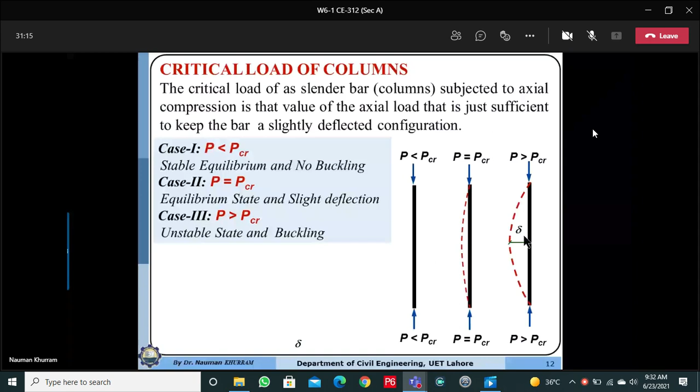So at load 80, the stress in this steel column will be 80 megapascal. 250 minus 80 means we still have 170 megapascal reserve capacity, which we believe it can carry as more stress. But what happens if I apply the load fractionally more than P critical, which is 80? If I apply load 80.0001, the column suddenly bends in the out of plane direction and fails. It will never come back to the original position.

That is the behavior of the column under compression. So buckling always occurs if the load is equal to or more than P critical. At this point, a sudden out of plane bending of the column due to axial compressive force is referred as buckling. This is how buckling is different from bending. So how can we define critical load? This is the load value at which the column slightly attains a deflected configuration, or this is the maximum load value that a column can withstand before buckling.

We can refer to this stage as stable equilibrium, because if the load is less than or equal to P critical and we remove the load, the column will come back to its original position. At zero load, the stress will be zero, and at P critical we will have the stable or neutral equilibrium. If the load is more than P critical, the column will never come back to its original position.

So this is the load versus lateral deflection graph, where delta represents the lateral deflection. If we keep increasing the load, there is no out of plane deflection until we approach a threshold value equal to P critical. If we apply load more than P critical, the column suddenly fails, buckles, or bends in the out of plane direction and fails. This phenomenon only occurs in an ideal column.

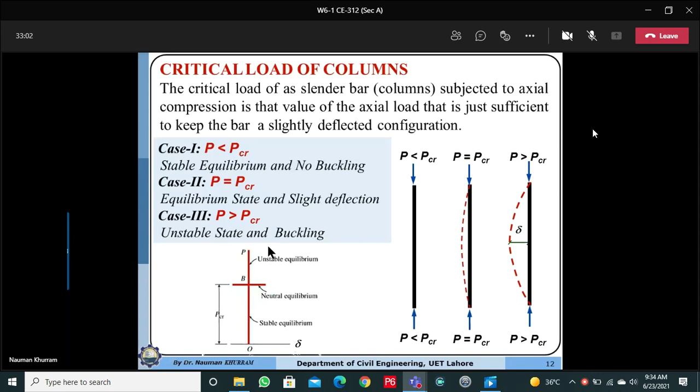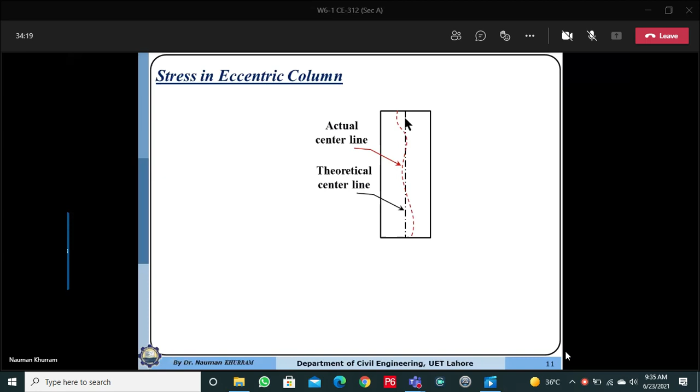An ideal column means the column which is prismatic, meaning it has a constant cross-section area, the material is homogeneous, and it's a straight column. It may have little out of plane deflection, and due to this, the actual center line may deviate from the theoretical center line.

Further, if the applied load is not passing through the theoretical or actual center line, rather acting at a plane or axis other than the actual or theoretical center line, the load will also have eccentricity. Here we refer to ET, the eccentricity between theoretical center line and actual center line, and EP, the loading eccentricity with respect to the theoretical center line. Due to this, if the column is a real column rather than ideal, we shall always have eccentricity.

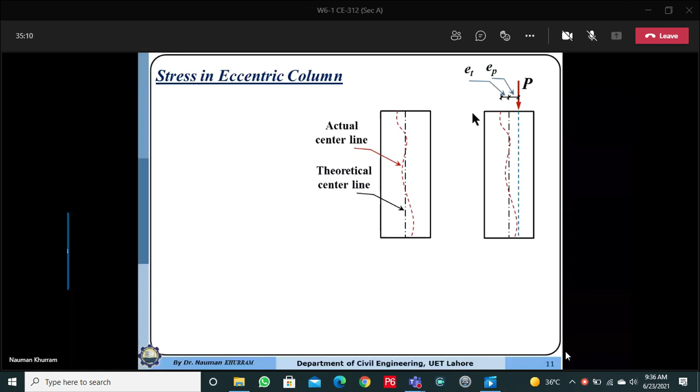Due to this eccentricity, the column will be subjected to bending moment along with compressive force. So what happens? The column is subjected to bending. For example, due to this total eccentricity, which is ET plus EP, the column will be subjected to a clockwise bending moment, and due to this clockwise bending moment, we shall have tension on one side and compression on the other. So the column is subjected to bending along with compressive forces.

In such a case, if we are having any eccentricity or imperfection, the column is subjected to some extra stresses, and its capacity will be less than the column corresponding to the ideal case, which is free from any eccentricity or imperfection.

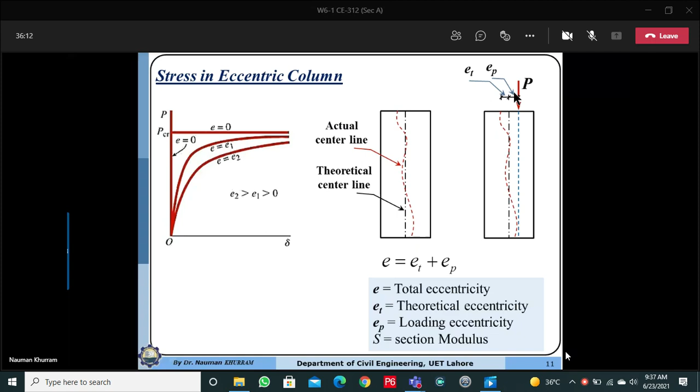And further, due to this bending moment, because the column is subjected to bending moment along with axial force, even though we keep increasing the load value below the critical load, the column will undergo small out-of-plane deflection.

This happens even though the load is less than P critical, until we approach the failure load. The failure load in an imperfect column will always be less than P critical corresponding to the ideal column. So P critical of a real column is always less than P critical of an ideal column, and with increase of eccentricity, even though the load is less than P critical, the column will undergo gradual out-of-plane deflection due to the bending moment.

The resultant stress will be P over A, the compressive stress due to axial force, plus MC over I, the bending stress due to bending moment. C is the distance from the neutral axis to the extreme fiber, because we are supposed to compute maximum bending stress. So the resultant stress will be the summation of axial plus bending stresses.

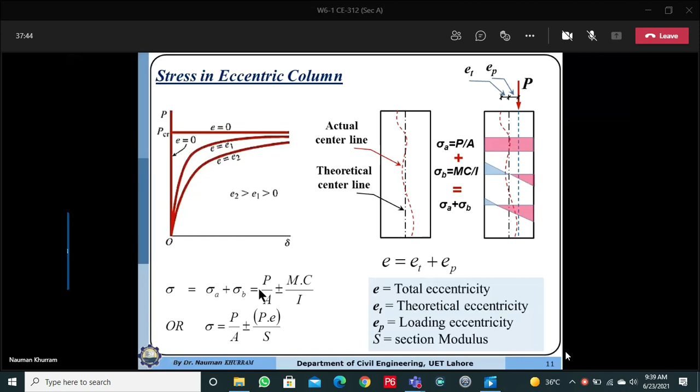If we sum up the stress components, we will have more compressive stress on this side and lesser stress here, because tensile and compressive stresses counter each other. So the resultant stress can be determined by this formula. I'm considering compressive stresses as positive. If you want, you can write a negative sign here, because we are supposed to compute the magnitude regardless of sign.

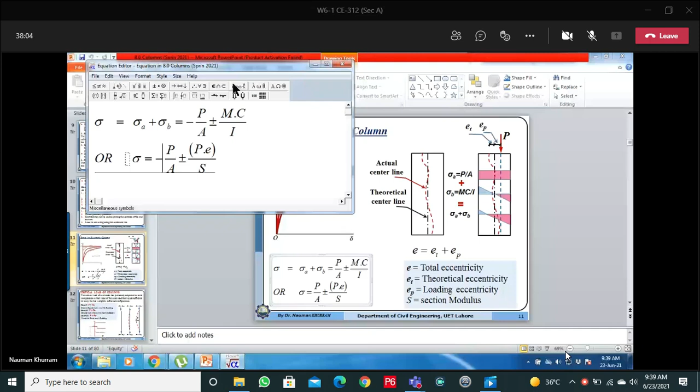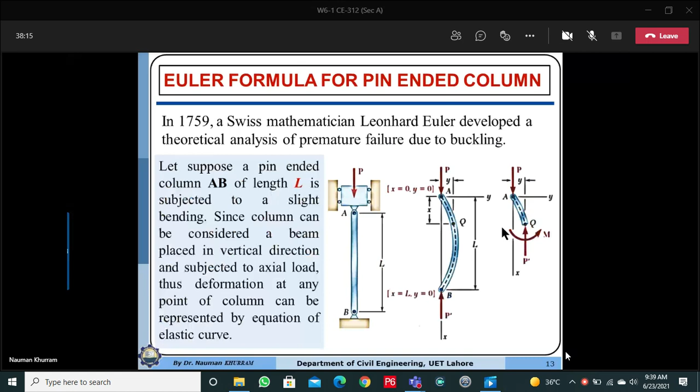So next, what I would like to explain: please go through the derivation of this Euler formula in the recorded video lecture, since most of the time I give some part from this derivation in my questions or quizzes.

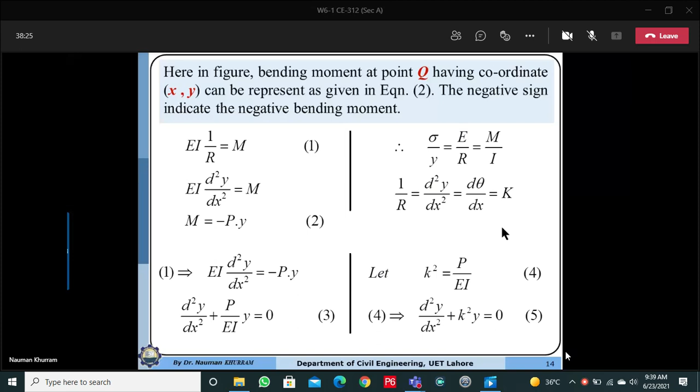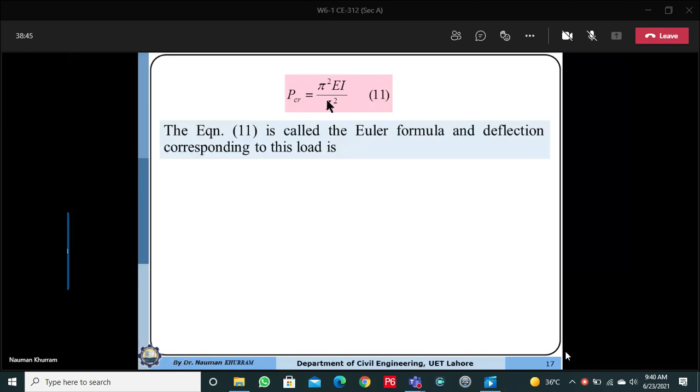In this derivation we derived the formula for critical load to determine the critical load for the long ideal column. The critical load of the long ideal column equals pi squared EI over L squared. We believe we have already discussed this in our lab classes, so I'm not going to explain the effective length factor and effective length in this slide.

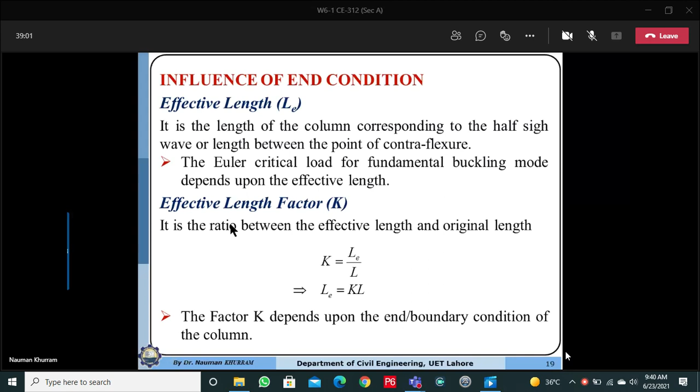Then we can convert the critical load into critical stress. If the critical load at which buckling may occur is divided by the cross-section area, we can convert it into critical stress. Critical load equals pi squared EI over L squared, and this area is here. Since I equals A times R squared, this A will cancel with the A from AR squared, and R will come into the denominator. So the expression becomes pi squared E over (L over R) squared.

This L over R is the slenderness ratio, which you can represent by R. Here pi is constant, E is constant, so it means that the critical stress of a long column is inversely proportional to the slenderness ratio squared, which is a quadratic function.

This formula is only applicable for the long column. So if you fix the stress value between the long and short column, you can determine the critical slenderness ratio.

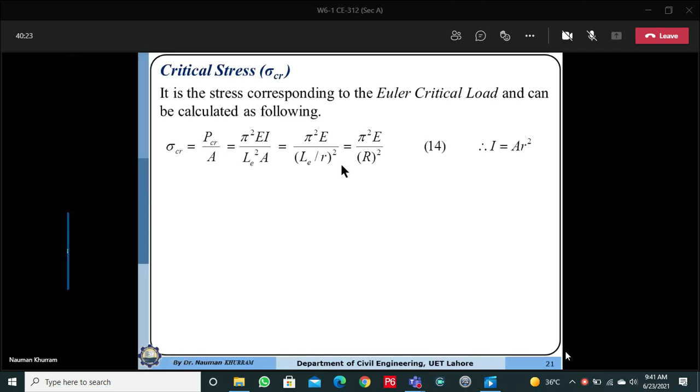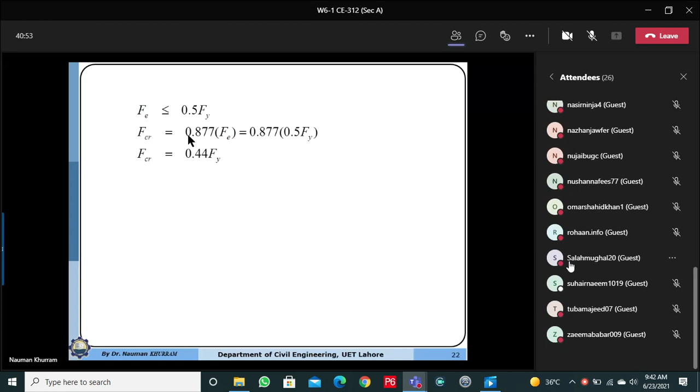Before coming back to this definition of long and short column, from our knowledge of steel structures, different codes and specifications categorize long and short columns differently. By AISC, the American Institute of Steel Construction, we do not have an intermediate column—we either have the long column or the short column. Depending on whether it's a long or short column, we need to determine the capacity by a different formula.

The capacity of the long column can be determined by one formula, and similarly the capacity of the short column is determined by a different formula, which is 0.658. I will show you this formula in a short while. So we have different formulas actually—I just want to give you the overview of steel structure design.

So in steel structure design, we have this threshold value: if a column fails at a stress value less than or equal to 0.5 Fy—if either the critical stress or buckling stress is less than or equal to 50% of the yield value—then the column will be regarded as a long column. Further, I told you that this formula is only applicable for an ideal column, which is free from any imperfection.

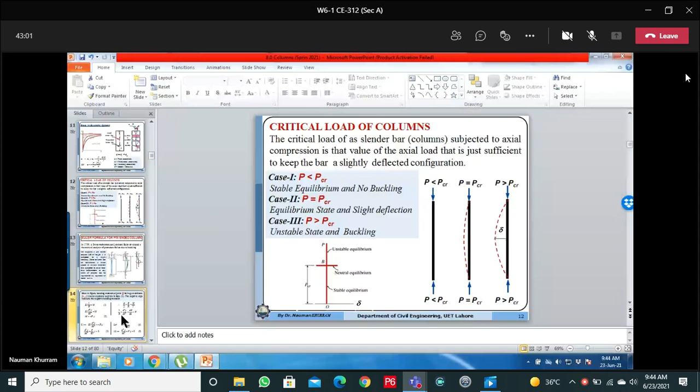So what is this factor 0.877? This is the capacity reduction factor due to imperfections in the column, to convert the failure stress of an ideal column to a real column. So 1 minus 0.877 equals 0.123, meaning we reduce the capacity by 12.3%. If you substitute the value of Fe as 0.5 Fy, the answer becomes 0.44 Fy.

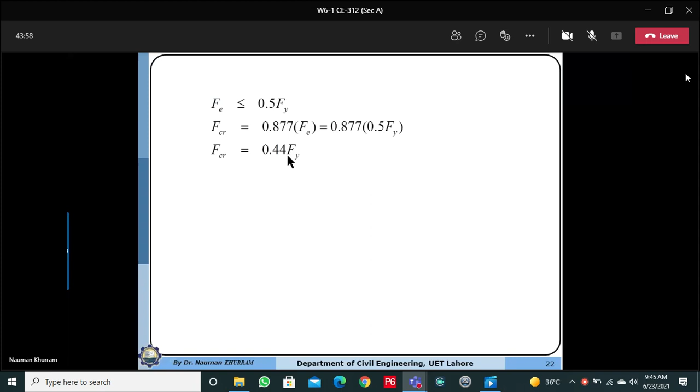So for A36 steel, just to refresh the knowledge, we know that Fy is equal to 250 megapascal.

It means that in that case, critical stress, maximum critical stress for the long column, this is the maximum value. It means that a long column will always fail at a stress value less than or equal to 0.44 Fy. So let me use this value, 0.44 Fy.

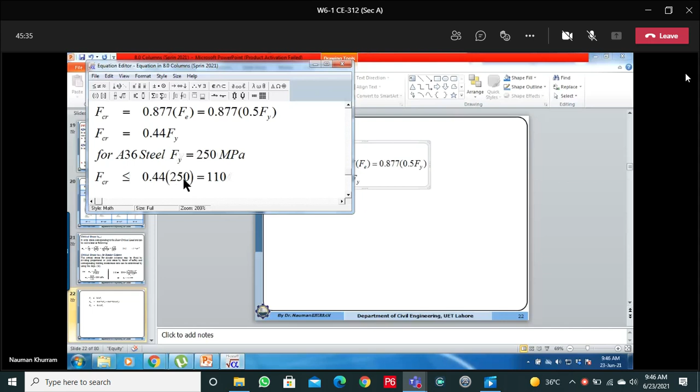So this value will be, what I say, 250, and the answer will be - let me compute the answer - 110 megapascal. So it means that a long column will always fail at a stress value less than 110 megapascal.

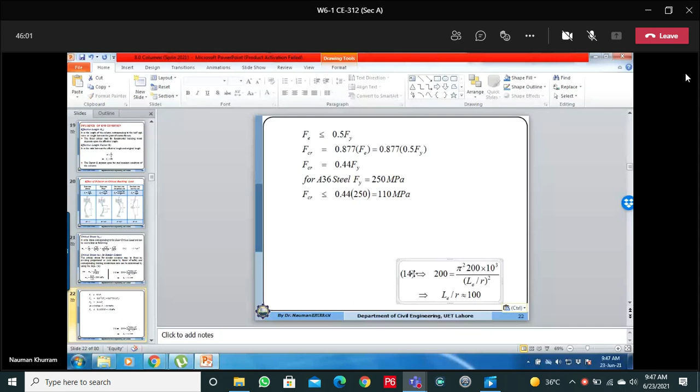This is not the exact formula that we are going to use. So we are having the formula for sigma critical. Sigma critical means this formula, so we are having this formula.

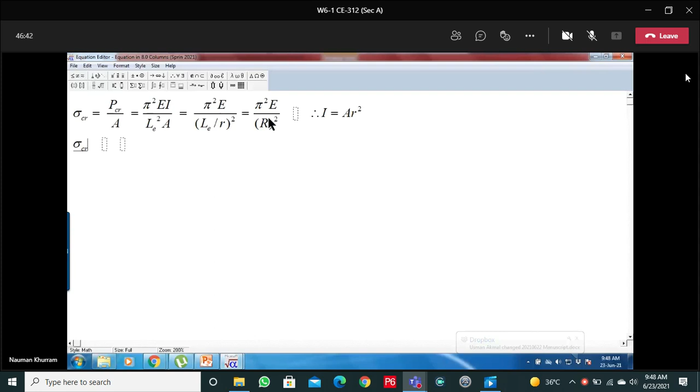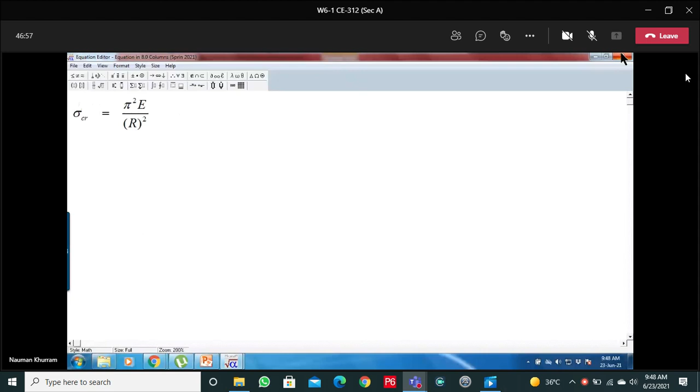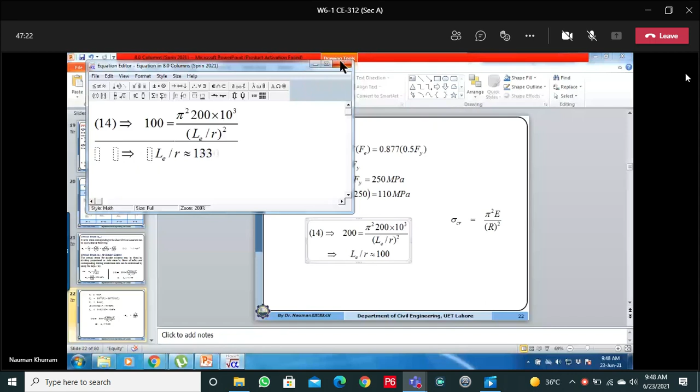So actually Fe and sigma cr are the same. In this formula, if you substitute this value as 110, you can determine the R value, and the R value that you determined was 133 in your steel structure. It means that if the slenderness ratio is more than 133, that will be a long column, and it will always fail at a stress value of 110 megapascal. So this was proposed by AISC.

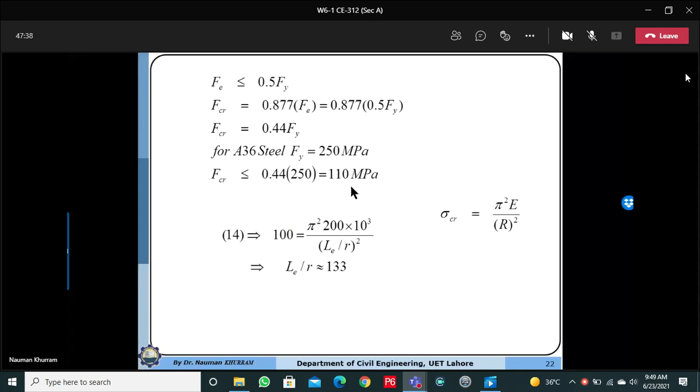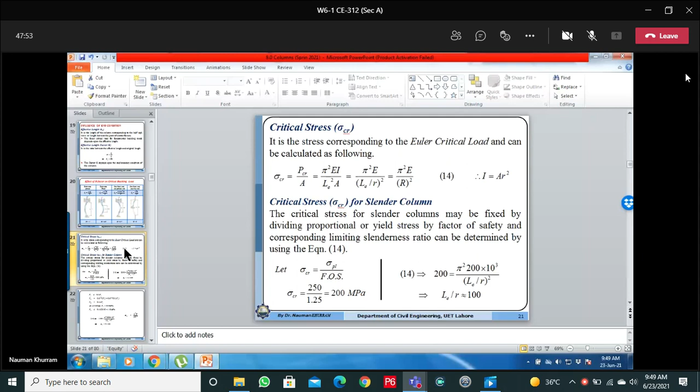But as per different structural analysis books, you can fix your own threshold value to differentiate between the long column and short column. The concept will be the same. AISC has fixed the value as I have explained here, but in this structural analysis book, a different value has been used. So I will give you that.

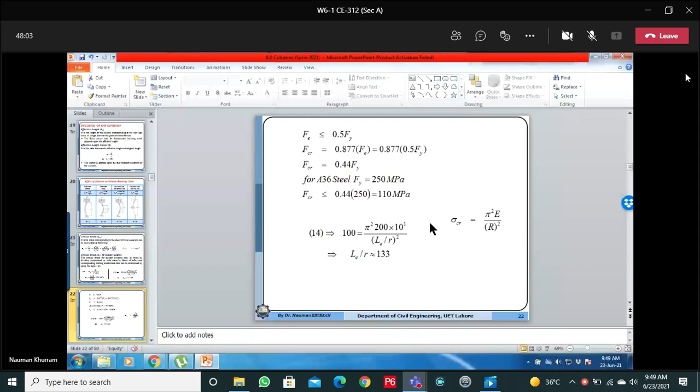So if you substitute critical stress equal to 100, you can compute the corresponding slenderness ratio, which is 133. It means that a long column is the column which has a slenderness ratio more than 100, or which fails at a stress value less than or equal to 200 megapascal for A36. So it depends upon what factor of safety you are using. A long column is the column which always fails at a stress value less than the definition here.

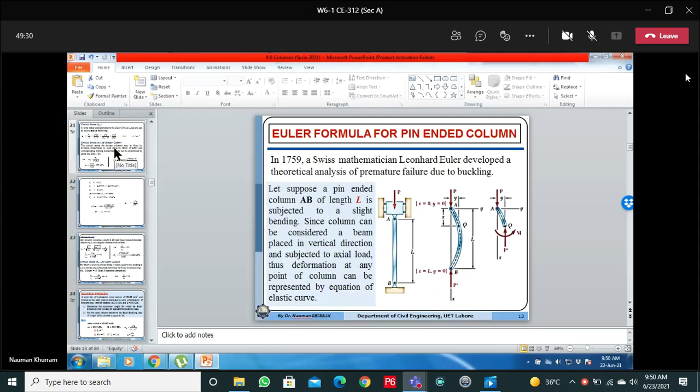Or there is another classic definition: if the length of the column is more than or equal to 30 times the least cross-sectional dimension. So if you see this derivation from the video recorded lecture, we are having slenderness ratio 100, so flexural effect will be dominant.

A long column will always fail due to buckling, and a short column is the column which primarily fails due to crushing or yielding of material - it never undergoes buckling. So the definition of long, short and intermediate column depends upon failure behavior, not upon slenderness ratio or critical stress. The slenderness ratio is indirectly converted from the failure behavior.

Normally experiments show that if the length of the column is less than or equal to 10 times the least cross-sectional dimension, then that column will never undergo buckling. That column will fail when applied stress equals the yield stress in case of steel, or the crushing value of the material for any other material. These types of columns normally have slenderness ratio less than 30. In between, we have the intermediate column. So I'm not going to discuss this problem.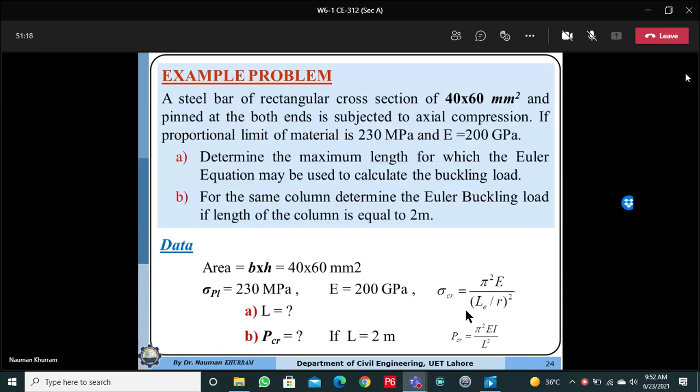So I'm only going to discuss the solution of one part from this example 10.1, and the book is Mechanics of Materials by Beer and Johnston, 6th edition.

Example is 10.01. We are having a column which has 2 meter length. Both ends are pinned, so K value is equal to 1.

We are supposed to design a square cross section column made of wood, with E value of the wood 13 gigapascal given, and maximum allowable stress value should not exceed 12 megapascal.

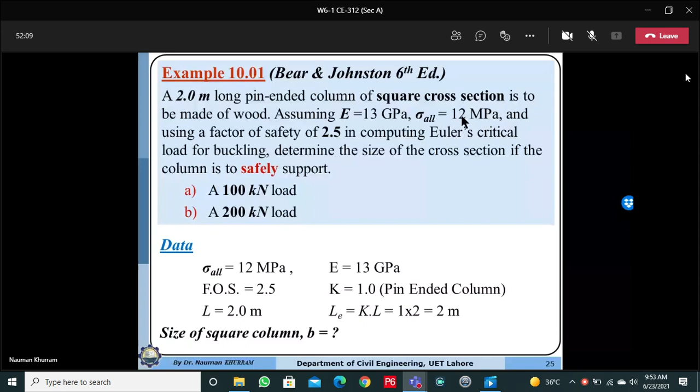Using factor of safety 2.5 in computing Euler critical load for buckling. So factor of safety is used to convert the critical load into the safe load, or to bring the stress value or loading from the collapse state to the safe limit. If the critical load is divided by factor of safety, we get the safe load value.

Determine the size of the cross section if the column is to safely support a load of 100 kilonewton and a load of 200 kilonewton. These are the safe load values given, not critical load. Safe load is always obtained by dividing the critical load with factor of safety.

I'm only going to discuss part B. Length is 2 meter, factor of safety 2.5, E value 13 gigapascal. Effective length will be K value multiplied by its length, which is 2 meters. K value is equal to 1 because both ends are pinned.

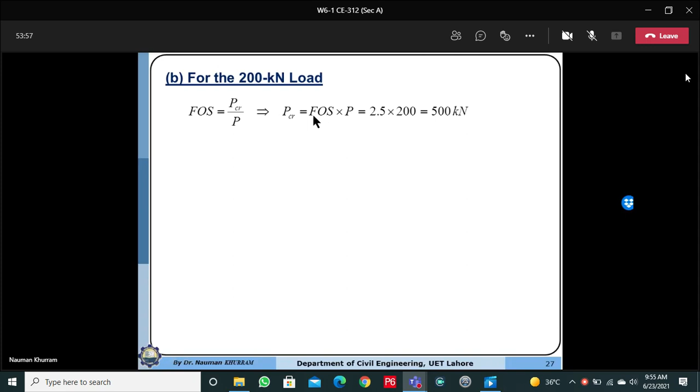For part B, factor of safety is the ratio between the critical load over safe load value. If we divide the critical load with factor of safety, we get the safe load. So we are given the safe load value, so we may reverse calculate the critical load by multiplying the safe load value with factor of safety 2.5, so critical load is 500. Why are we doing this? Because we only have the formula for critical load.

When we use this Euler formula, we have P critical value. We know the E value for the wood. We know the effective length. Pi is constant. The only unknown is moment of inertia.

So we can represent this equation in terms of I value by cross multiplication. Substitute P critical value 500 kilonewton multiplied by 1000, because all values in this equation should be in Newton and millimeter, so units should be consistent. Length is also in millimeter, and E value is also in megapascal, since we are given 13 gigapascal. After computation, we get the answer 15.588 into exponent 6.

Now we're supposed to compute the size of the square section. For a rectangular cross section, if both dimensions are equal to B, moment of inertia is equal to B d cube divided by 12. Since D is also equal to B, moment of inertia of this square section is equal to B power 4 divided by 12.

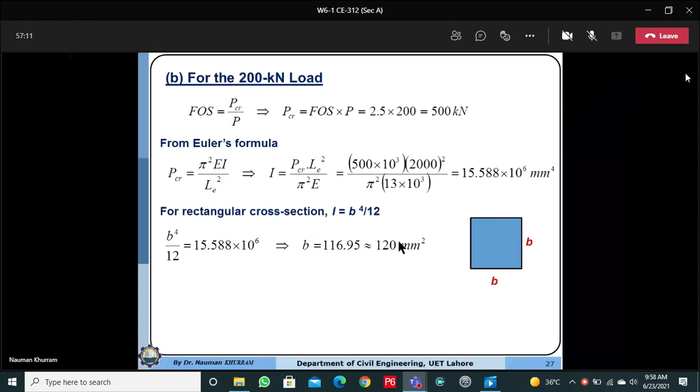So what shall we do? It means the size of the column will not be based on the critical load. Rather, it will be based upon the allowable stress value or the safe load value. So we shall reverse calculate from this expression.

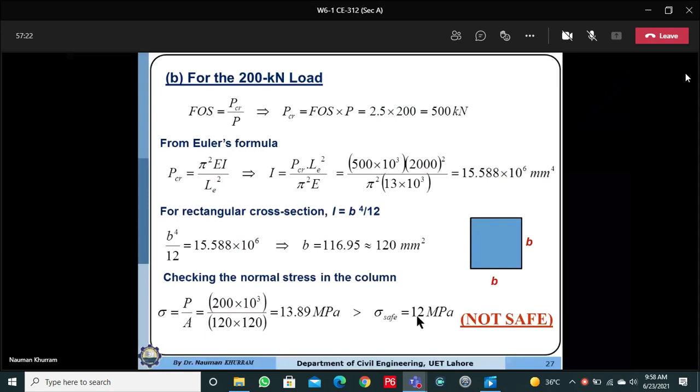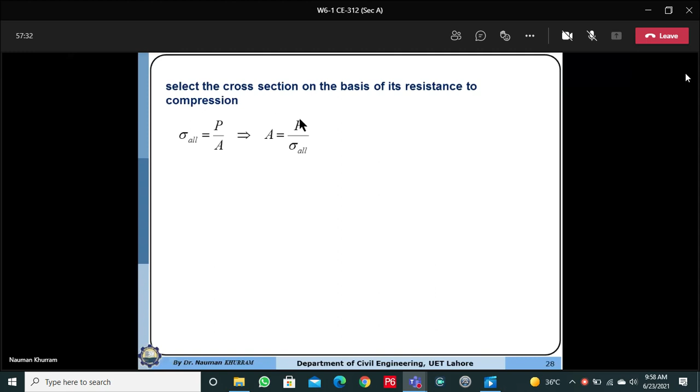Sigma allowable is equal to P safe divided by cross section area. Area is unknown, P safe is 200 kilonewton, converted into Newton by multiplying by exponent 3, divided by 12 megapascal. So area is computed as 16.67 into exponent 3 millimeter square.

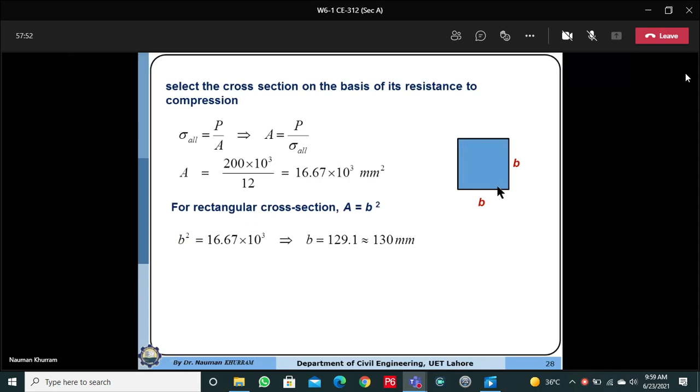Area of square is equal to B square, so B square is equated with this expression. We compute the B value as 129.1, and we convert into the multiple of 5 mm on the higher side, so B value is equal to 130. The final cross section area will be this one.

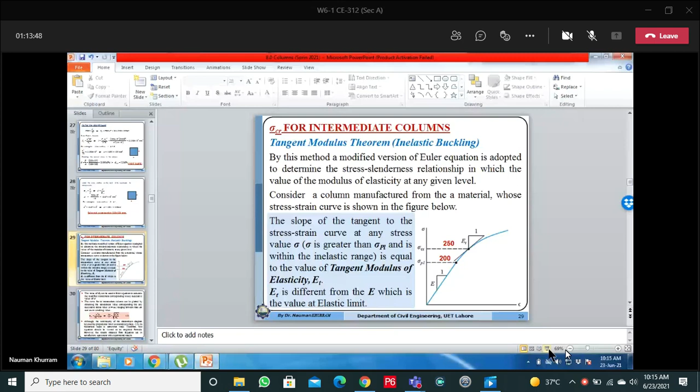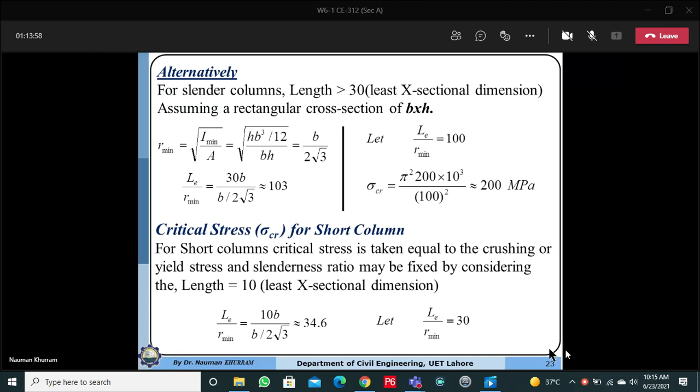Okay, so next is the intermediate column. I have already explained that a long column, as per the definition discussed in this course, is one which is either having slenderness ratio more than 100, or maximum failure stress 200 megapascal.

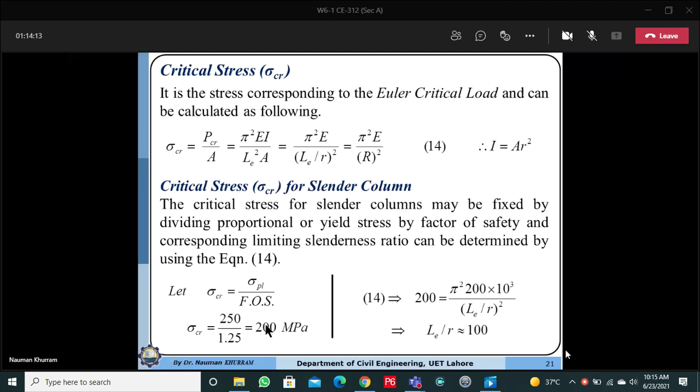So let's suppose if we are having a material, for example A36, the yield stress is 250 megapascal. The proportional limit, or the maximum stress we are considering for the long column, is 200 megapascal. So within this range, if failure is less than 200, we consider that this is the range for the long column, and in this range the E value will remain constant.

So it means that if we know any particular stress value, by using the critical stress formula for the long column, we can determine the corresponding slenderness ratio, or by using this formula. So if we substitute any stress value from 0 to 200, we can compute the corresponding slenderness ratio, because E value will be constant.

But the intermediate column will be the column which fails at a stress value between 200 to 250. So this is the non-linear range, in the inelastic region. It means that the slope of the stress-strain curve is changing at all points.

So this tangent modulus theorem is the graphical method that will be used to plot the slenderness ratio versus critical stress graph, or to determine the critical stress for any column with any particular slenderness ratio, or to determine the slenderness ratio of a column which fails at a stress between 200 and 250.

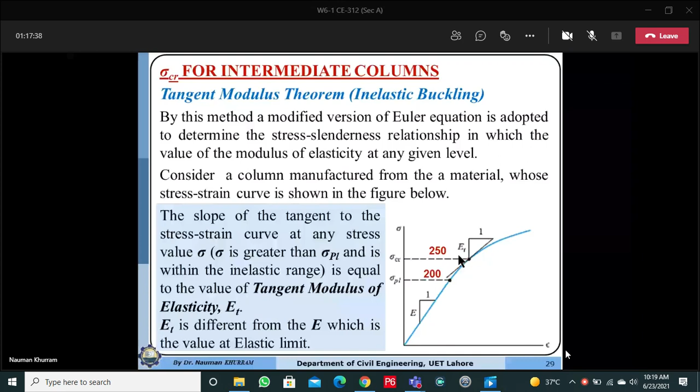So we need to modify the formula, and just substitute the corresponding tangent modulus for any slenderness ratio or for any critical stress value. For the long column, the E value will be a constant.

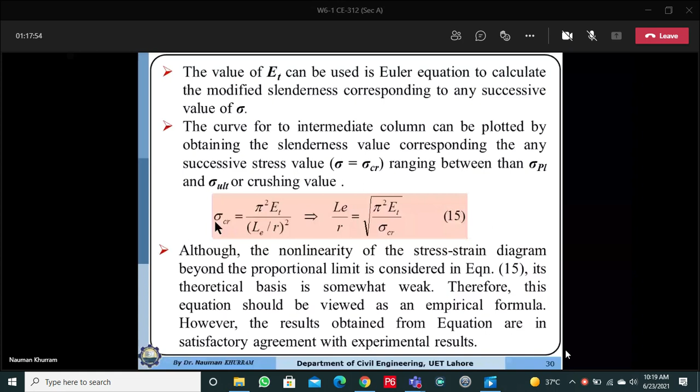So if we do this, we can plot this region. If the slenderness ratio is more than 100, this curve can be plotted using the formula. If you substitute this slenderness ratio, maybe from 100 to 200, with a constant E value, you can determine the corresponding critical stress, the stress value at which the column will buckle corresponding to any slenderness ratio.

And a short column, which has slenderness ratio less than 30, will always fail at a stress value equal to sigma y. So how are we plotting this range?

First we assume the stress value 250 in this formula, and we determine the corresponding tangent modulus, and we determine the effective slenderness ratio. Then we keep changing the stress value from 250 to 200, and corresponding to any stress value, we substitute the corresponding tangent modulus to determine the effective slenderness. So this curve is plotted using the tangent modulus, which is the graphical method, because we must have the complete stress-strain curve.

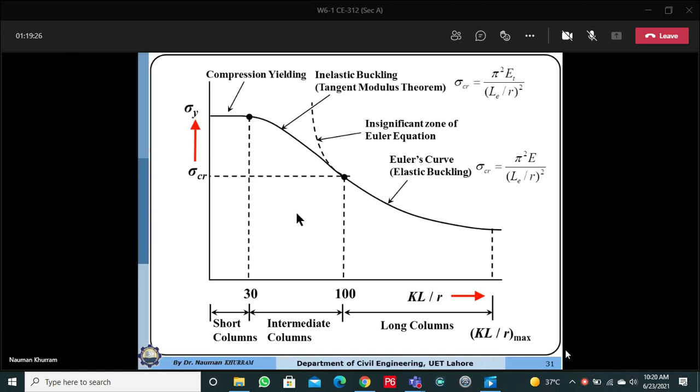Okay, next formula is the Rankine-Gordon formula.

Gentlemen, there's no light. Let me open the windows.

So Rankine-Gordon formula is an empirical formula. This formula is applicable for all types of columns, but normally we use it for the intermediate range of slenderness ratio. This formula was first proposed by Gordon, which was further modified by Rankine.

As per Rankine-Gordon, we do not have any perfectly long column or short column. As per them, all types of columns fail due to the combined effect of axial forces and buckling, with more and less value. It means if a column fails at a load of 100 Newton, maybe 30% of the stress, or 30 megapascal, will be due to the flexural effect, and 70% will be due to the pure axial stress. So all types of columns, whether short or long, fail this way.

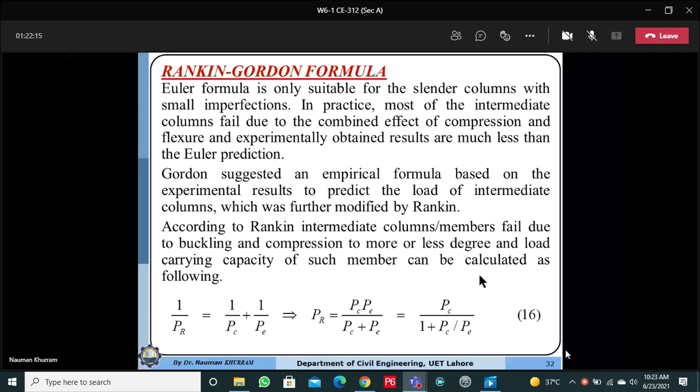PE is pi square EI over effective length square, and P sub C is the ultimate compressive load carrying capacity, which can be computed by multiplying the cross section area either with the yield stress or ultimate stress value.

If we substitute the values here in this equation, so PC is equal to sigma y into A for a steel column. This is P sub C, and this is P critical.

After that simplification, I is equal to A R square, and this A will be cancelled out with the other one. We can separate out and bring the effective length square to the top side, so LE square over R square can be written in terms of slenderness ratio square. You will see that these three parameters are all constant: for any specific material, sigma y is constant, pi is constant, and E value is also constant.

So these three constants can be replaced by a single constant, called the A value or Rankine constant. The final formula will be PR equals sigma y into A over 1 plus A into LE over R square, where A is the Rankine constant, depending upon the boundary condition and material properties sigma y and E.

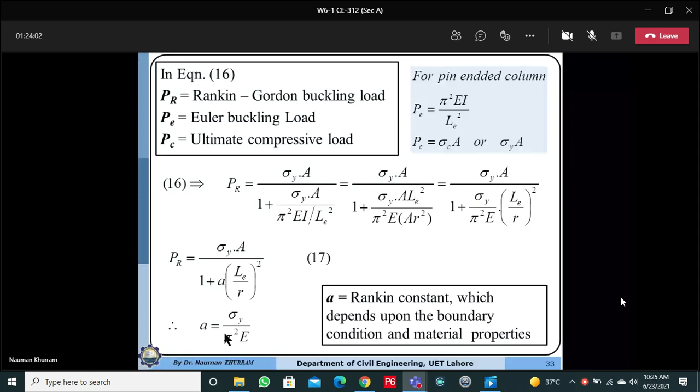So the Rankine formula can be used for all types of columns, but it gives a more accurate value for a medium range of slenderness ratio, mostly for intermediate columns.

So here we are going to discuss a problem. I will quickly discuss it because I'm short of battery, as there is no light at the moment here.

A cast iron column has 200 mm external diameter, is 20 mm thick, and 4.5 meter long. So we are having a circular hollow pipe. Yield stress is 550 megapascal, outside diameter is 200, thickness is 20 millimeter, and length of the pipe is 4.5 meter.

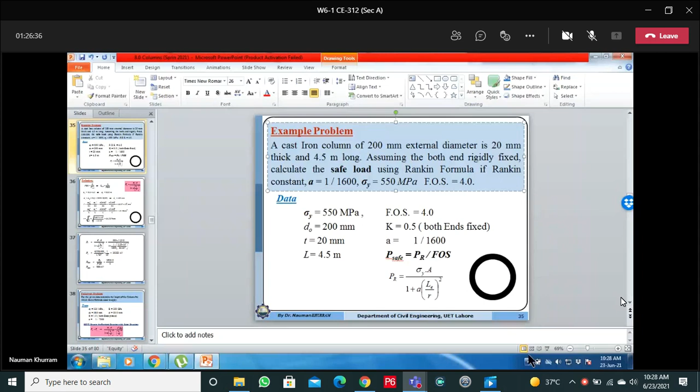Assuming both ends are rigidly fixed, compute the safe load value using the Rankine formula. Rankine constant is given as 1 by 1600, with yield strength of material 550 megapascal, and a factor of safety of 4 will be used to determine the safe load value.

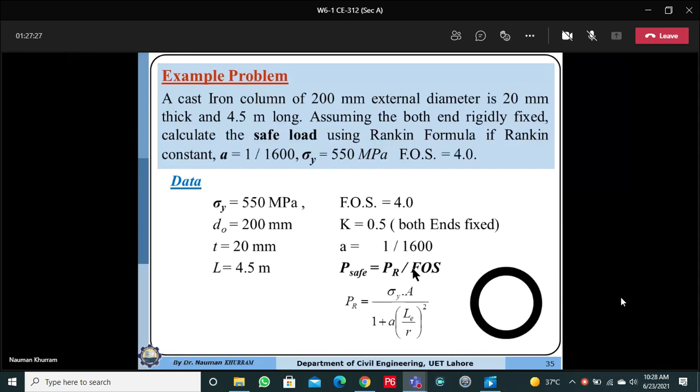So first, as discussed, P safe is equal to P Rankine over factor of safety. So first we need to determine the Rankine critical load. It's always good practice to write down the formula first so I can determine which values or parameters are given and which are not. To determine the Rankine critical load, we are provided with sigma y, the Rankine constant, and the effective slenderness ratio, so radius of gyration and cross-section area are required.

Both ends are fixed, so K value is equal to 0.5, the effective length factor. So effective length will be equal to 0.5 into 4.5, giving us the answer 2.25.

We shall determine the internal diameter, which equals outside diameter minus 2 times the thickness. Thickness is given, so D inner is 160. Next we determine moment of inertia, which is pi d outer^4 divided by 64, minus pi d inner^4 over 64. After substituting the respective parameters, moment of inertia is 46.37. And cross-section area is pi d square by 4 minus pi d inner square by 4.

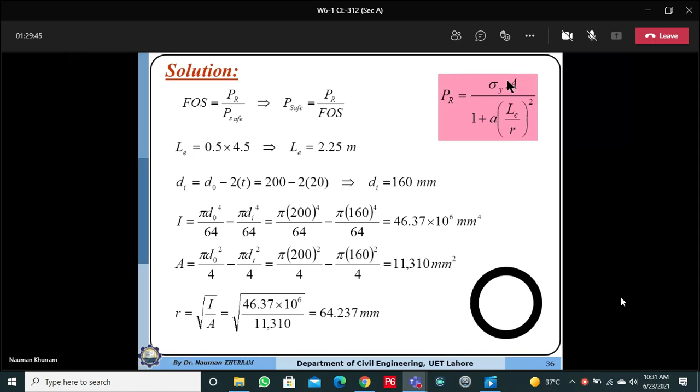Now we also have R value and A value, so we can easily compute the Rankine load using this formula. After substituting the values, A is 1 by 1600, and effective length is 2.25 into exponent 3 - we need to convert the length into millimeters. So we shall divide the load value by 1000 to convert the load into kilonewtons, which is 3520.3 kilonewton.

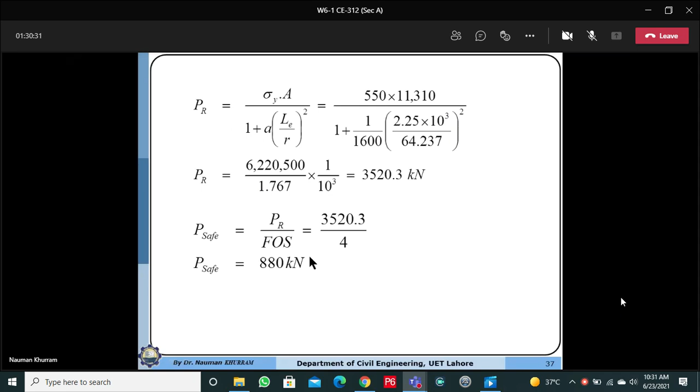So the safe load value will be equal to P Rankine divided by the factor of safety, which is given as 4. So the answer will be 880 kilonewton.

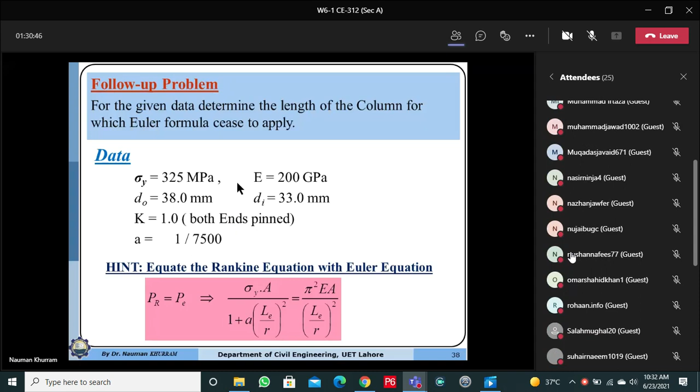So that is our next follow-up problem that I am not going to solve, but I am giving you the hint. We are having again a circular pipe. Yield strength of the material is 325 megapascal, modulus of elasticity 200 gigapascal. External diameter is 38 mm and D inner is 33. Both ends are assumed to be pinned. Rankine constant is given as 1 by 7500. So for the given data, determine the length of the column for which the Euler formula ceases to apply.

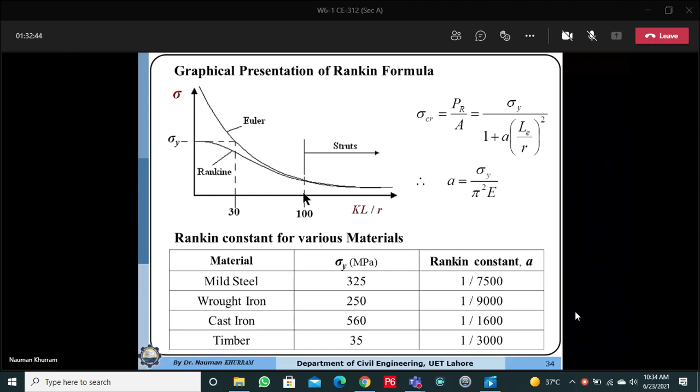It means that at this boundary point, both the Rankine formula and the Euler formula will give the same answer because this is the boundary point. So I'm assuming that at this boundary point, critical load determined by the Rankine formula equals critical load determined by the Euler formula. If I equate both - this is the Rankine formula, this is the Euler formula, pi square E A over L E over R square - by equating these two, you can determine the length, because R is given. So you can solve this problem yourself.